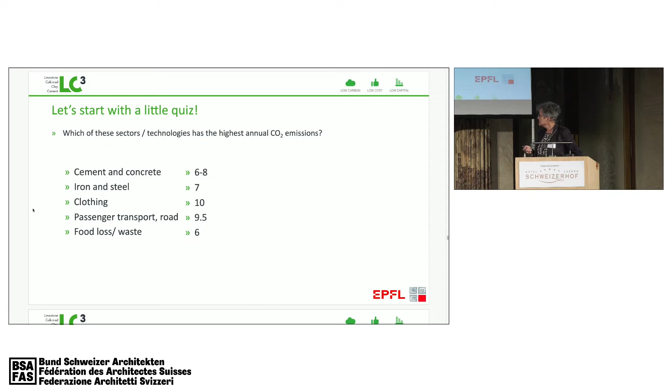So you see here I've compared various different sectors: cement and concrete, iron and steel, clothing - maybe a big surprise there - passenger transport, road, food loss, food waste. The message here is yes, cement and concrete is making a lot of CO2 and we need to improve that, but there are a lot of other things emitting the same kind of amount of CO2, so we need to really work on everything.

Now, the reason we have these very high emissions from cement and concrete is that we produce so much of it. We produce more materials based on cement than we do of all other materials put together. And in fact, as you see at the top here, it's intrinsically a low energy material with low embodied CO2 and embodied energy.

So we don't really improve things by replacing concrete with other materials, but we couldn't do that at any rate because timber is a very good material for construction, but if we wanted to replace just a quarter of materials made from cement with timber, we would actually have to plant new forest 1.5 times the size of India. I think we can easily realize that this is just not feasible given the competition for land use.

Most of what I'm going to say - I don't know what's happened to these slides, because they seem to be in a completely weirdo format and they don't move.

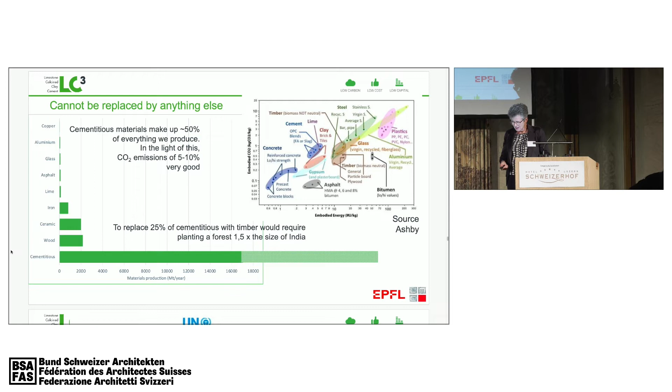Cement is kind of unusual in that most of the CO2 emissions are not coming from the energy. This is important because even though we can move to renewable energies, it's a little bit more difficult for cement - that's not really going to solve the problem.

A cement kiln looks like a kind of dirty industrial tool, but there's been immense improvements in efficiency in the last few decades, and now it's actually one of the most efficient high-temperature processes there is. It can also be really effective for waste disposal, because in Europe many factories, including those in Switzerland, are operating with more than 80% waste fuels, which really reduces the need for fossil fuels. So most of the emissions are coming from limestone.

Limestone is 80% of the raw material, and during the process it breaks down into calcium oxide and CO2. I'm going to come back to that, because of course a lot of people say, well, can we replace limestone? We'll see the answer to that in a minute.

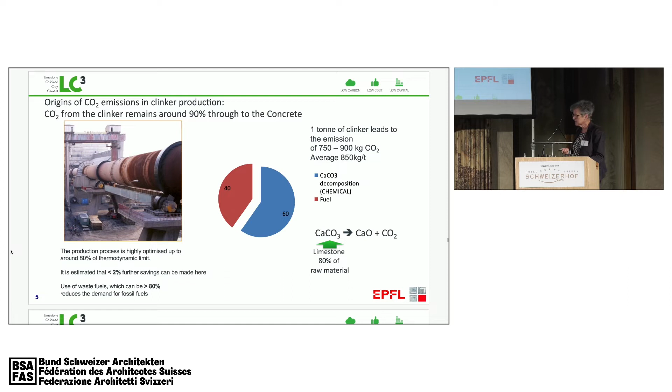In terms of where concrete's being used, we have to realize that only about 10% is being used in developed countries - only 5% in Europe, and the amount used in Switzerland is really very tiny. Therefore, if we're going to address the problem of cement and concrete, we have to engage with what's going on in emerging and developing countries.

We've seen tremendous growth in China in the past three decades. China's probably peaked now - the demand for cement is going down, but this is now going to be replaced by demand from India and particularly Africa.

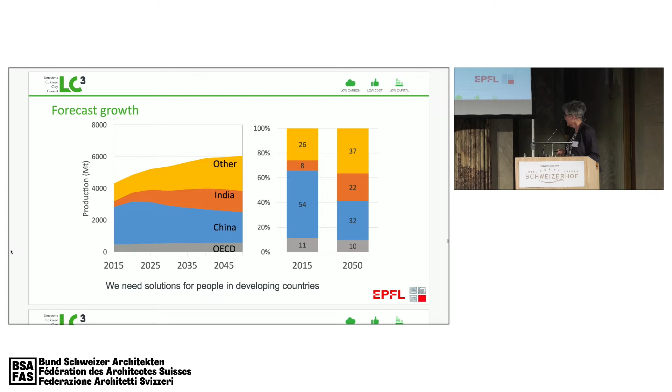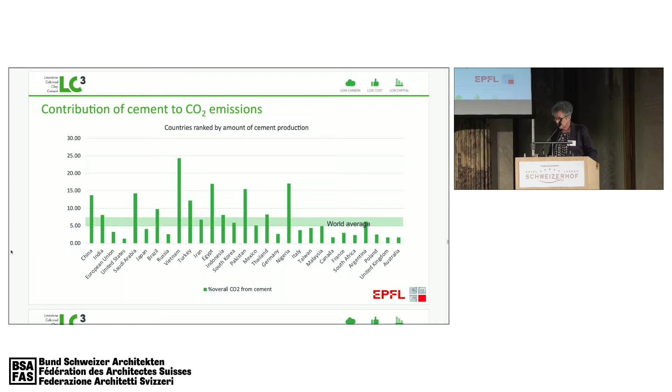And of course, in these countries, we have a very large need for housing for people. Oh dear, now it's not working again.

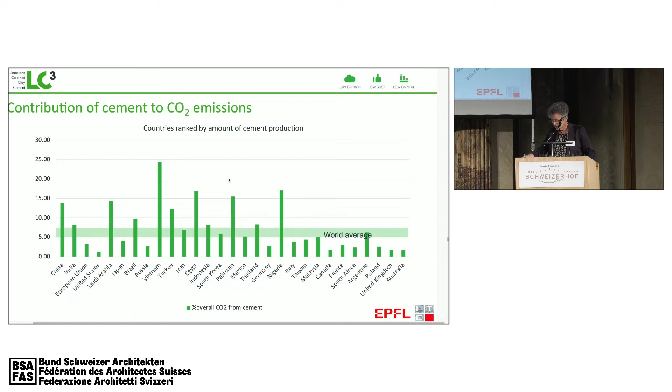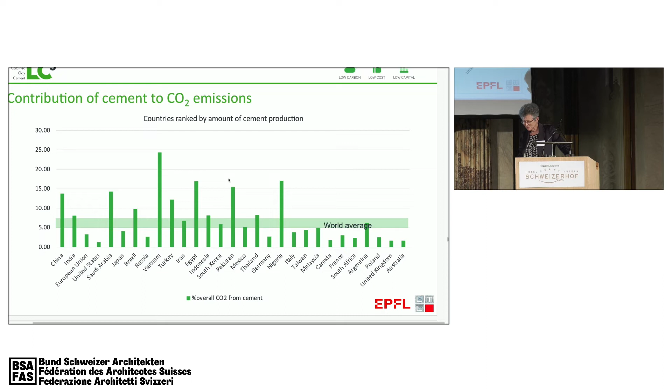You see that many people are living in really unsanitary housing conditions. This leads to a lot of disease, and the unsatisfactory living conditions give a big incentive to people to try to migrate. So if we want to solve this problem, we really have to be able to provide them with decent housing.

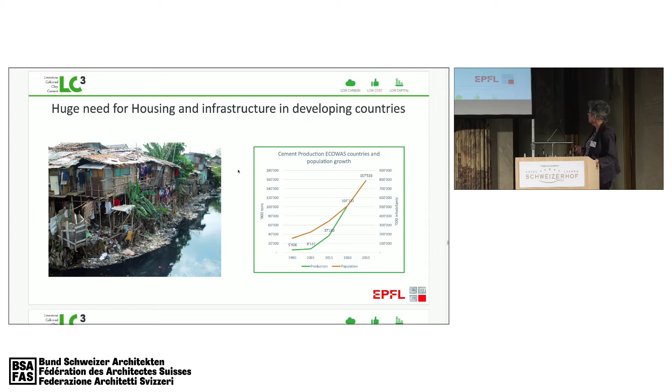The figure on the right shows first of all the real figures, but then the projections for the increase in demand, in the population, and therefore demand for cement that's occurring, for example, in the West African region.

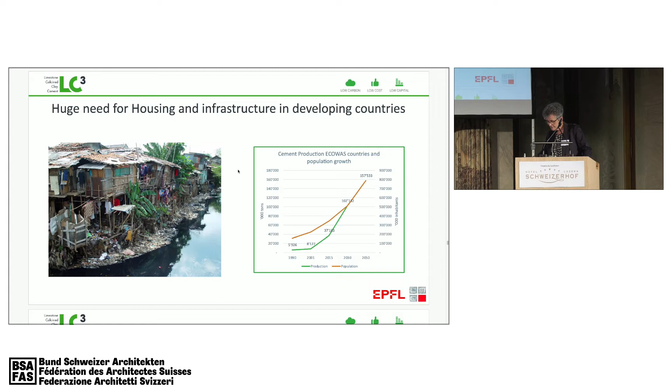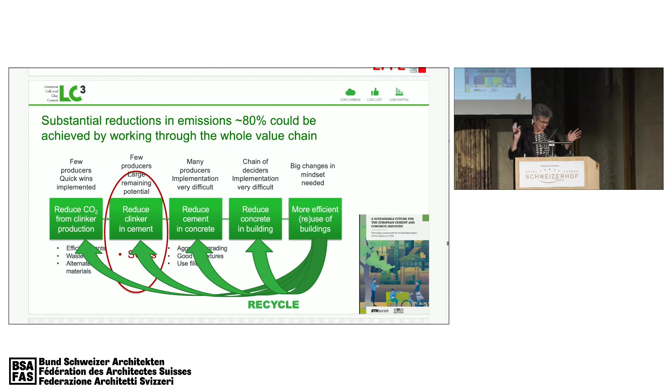Whoa. It's very bizarre. I have all nice animations on all of these slides, but none of this is working. But let's worry about that.

The important thing to realize is there's really no magic solution for doing away with the CO2 emissions from cement. Many manufacturers are saying we have to go for carbon capture and storage, but I think we know this is really not a realistic solution because it's going to be extremely expensive and very difficult to implement.

On the other hand, we can actually make very large reductions if we work at all the different levels. I'm going to speak a bit more about how we can reduce the clinker in cement by using substitute materials, but we also need to work on reducing cement in concrete, reducing the concrete in the buildings, which is of course where you architects come in, and more efficiently using, and of course reusing buildings rather than demolishing them. And if we have to demolish them, then we have to make sure we can recycle.

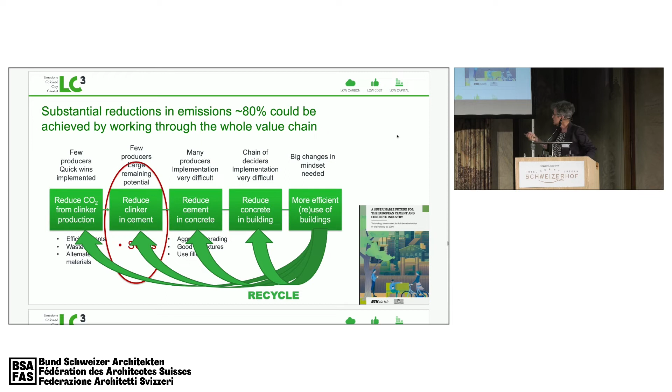Concrete can very well be recycled on many different levels. You can take elements and put them into new buildings, or you can crush them up and put them back in concrete, or you can use the fine material to make new cement. So there's many different levels you can recycle on.

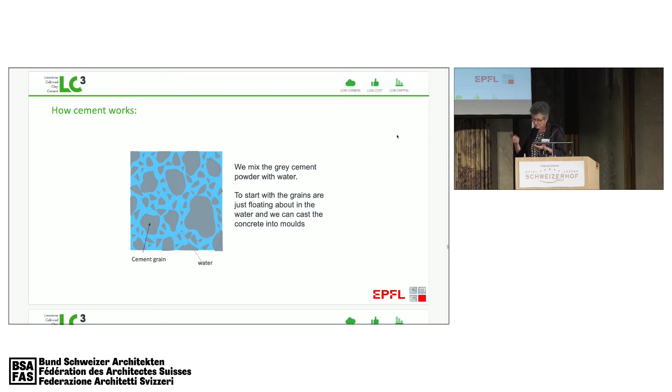If we think how cement works, a very simple scheme is like this: at the beginning we have this gray powder floating around in water, and this is very nice because it makes the material fluid. We can place it in the forms, and then what happens is the cement starts to dissolve, like if you put sugar in your coffee, it will dissolve. It will dissolve and go into the water, but then the different elements that make up the cement get into new combinations.

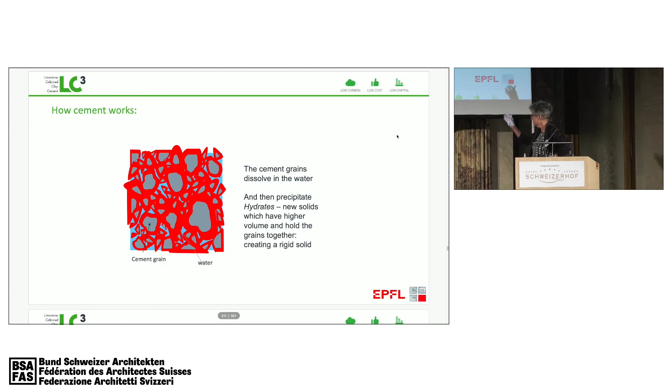What happens is they deposit these new materials, which are called hydrates, and here I'm showing them in red. Because these are combining with the water, it's actually a chemical reaction with the water, it occupies a higher volume and it sticks all the grains together.

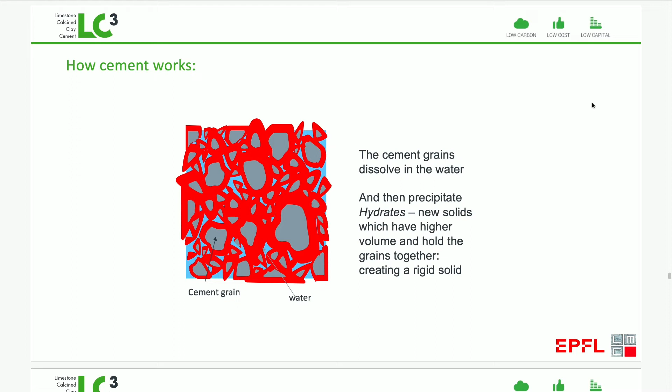Now, if we want those properties of being able to dissolve and then deposit these new hydrates, what we find is that when we look at these elements that are very abundant, the sodium and potassium are too soluble, while the iron and magnesium are too insoluble. So we come to a system of just three oxides.

This is kind of amazing, because we've taken the whole composition of the Earth and we end up finding that there's only basically three elements with oxygen that we can use. And of course, this means that we can really explore all the options. There's no surprise out there.

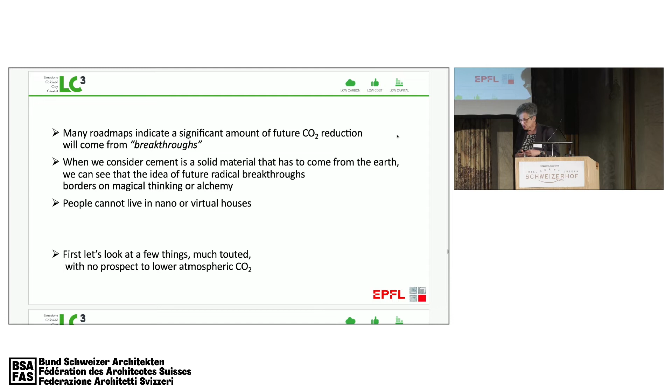I think this is important because when you read the studies that many people have done in their roadmaps, they come up with solutions that are possible, and then there's this big gap between what's possible and what we need to do. They say, well, there's going to be some breakthrough in the future. But what I want to convince you is that there really is going to be no breakthrough, because of the composition of the Earth, which clearly is not going to change.

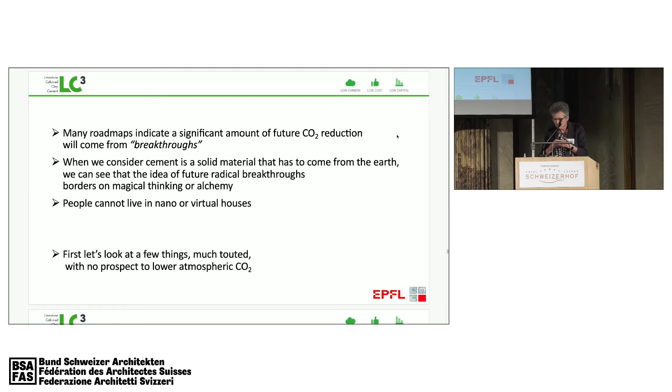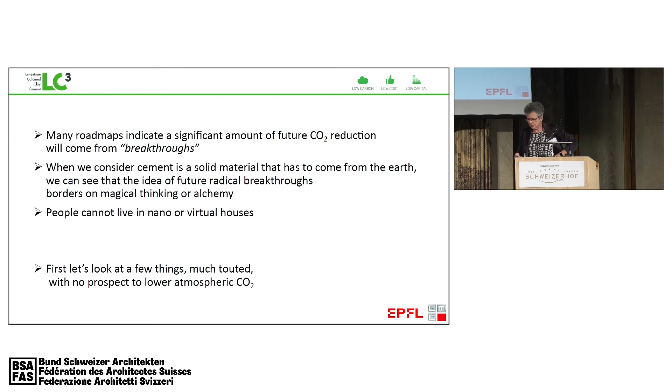And the fact that cement is a solid material, we can't miniaturize it. People can't live in nano houses or virtual houses. Unfortunately, there are a lot of people out there saying things that aren't true about what can be done to make cement with lower CO2. One of the things people are saying, they're not really understanding the process.

So the process, as I've explained, we start with limestone. This gives off CO2 during production, and in fact it can reabsorb that CO2 over its lifetime. The problem is that's not a solution, because the reabsorption occurs much, much more slowly, over 100 years or so.

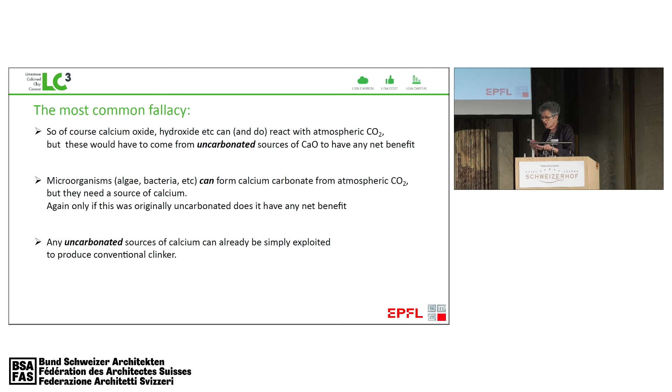Some people say what we can do is add things like calcium oxide to cement, and then it will absorb more CO2. Well, this is kind of true, but it's actually no help, because they don't really take account of where you get the calcium oxide from. In getting the calcium oxide, you give off a lot of CO2, and you can't gain back more than you gave out in the first place.

Similarly, there are a lot of romantic notions that we can use algae and bacteria to form calcium carbonate, and they do form calcium carbonate, but the problem is they also need calcium to do that. So you have to give them a source of calcium, and only if this was uncarbonated—and we have hardly any of that around—does it have any net benefit.

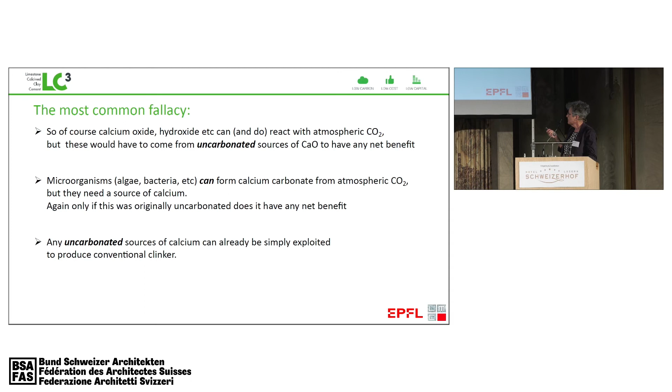The next slide is another technology, but I'm going to skip over that since we're running out of time. The message is that Portland cements will dominate, and what we can do is replace a large part of the Portland cement with other materials.

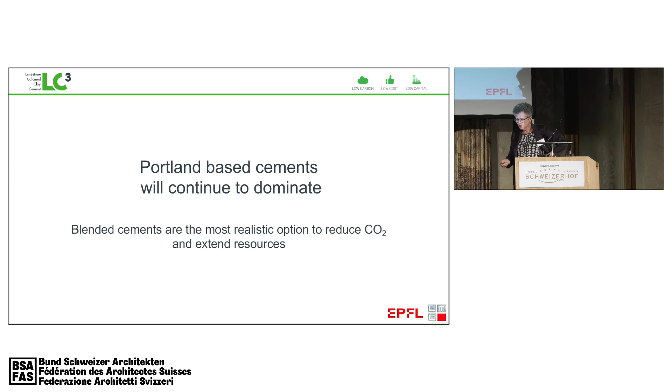In the past few decades, what we've done is use byproducts of other industries, particularly fly ash, which comes from burning coal, and slag from producing steel. Both of these can be substituted in cement. But the problem is that the amounts of fly ash and slag available are quite small, and therefore the level of substitution can't go up more than what it is today.

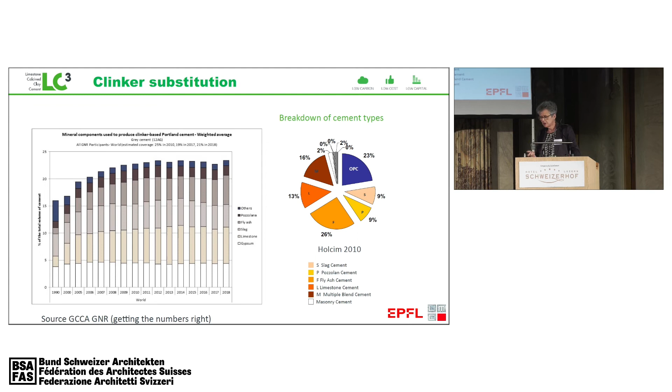And moreover, things like fly ash are probably going to disappear, because this comes from the CO2-intensive process of burning coal. So we have to look at what else we can have available, and basically this is where we come to the idea of calcined clay, which is what we're really working on in our lab, because clay is super abundant.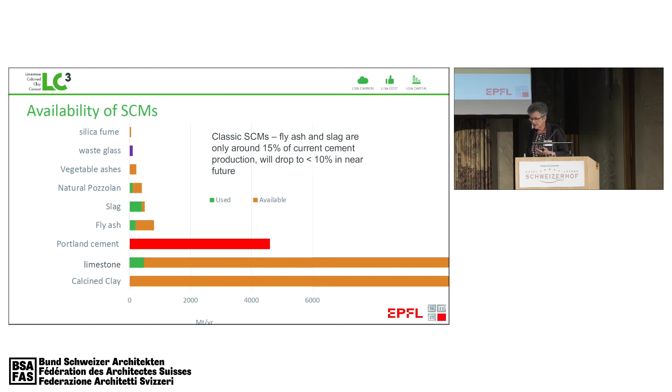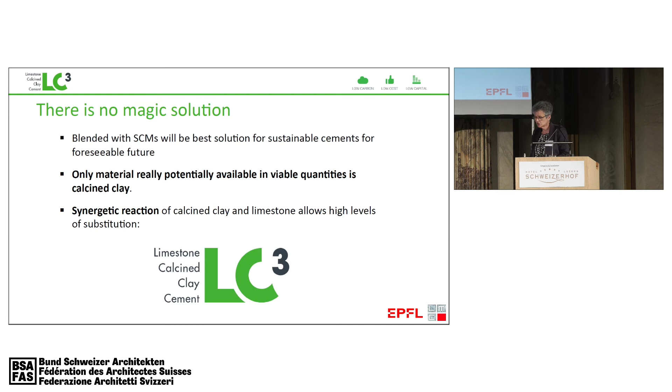If it's calcined, that's to say heated to a modest temperature of about 800 degrees, it becomes a very reactive material. You can use a combination of calcined clay with limestone to give high levels of substitution. On the next slide, you'll see that for a material with 50% less clinker, you can get the same strength evolution, but with 40% less CO2, which is very interesting.

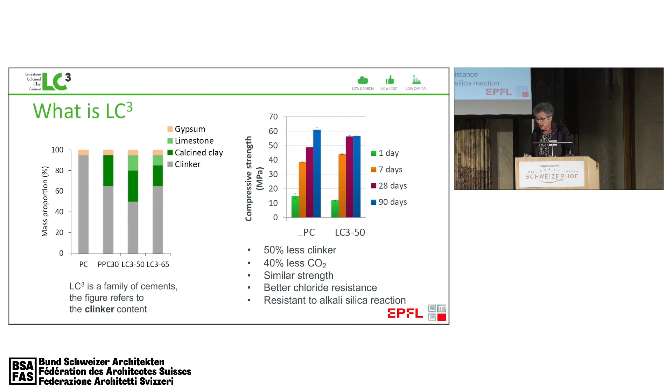Some properties are even much improved, like particularly resistance to chloride, which is the number one cause of poor durability in concrete, because it corrodes your reinforcing steel. And the kind of clays we need are really very, very widely abundant.

So everywhere you see this kind of orangey, brownish orange color, then you have the suitable clays you need. These are actually available in those countries where the demand is really going up, notably Africa, South America, and Southeast Asia.

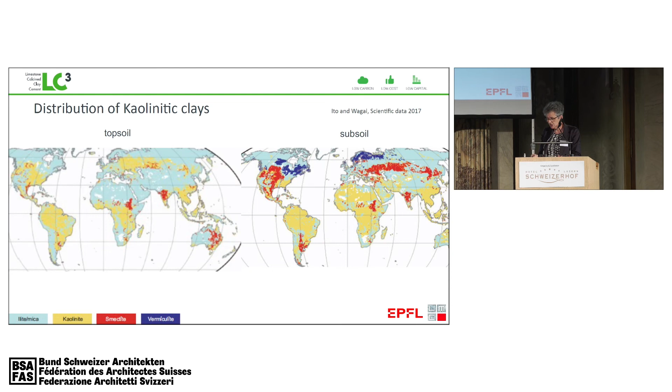So this is really a viable solution because we have these materials available. And often even these materials are byproducts from other mining operations, like that you saw very quickly.

Oh dear, sorry. Oh dear.

So if you can really roll out this technology, and it is very, very easy because you can apply it with existing technology, we have a potential to save 400 million tons of CO2 per year. And that's a really important figure. Just to put it in perspective, it's like 10 times the emissions of the whole of Switzerland.

So we know how very difficult it will be to go to total carbon neutrality in Switzerland. Of course, we should do it. But if we invest in this technology, we can have 10 times more impact. And of course, CO2 doesn't stay within national boundaries.

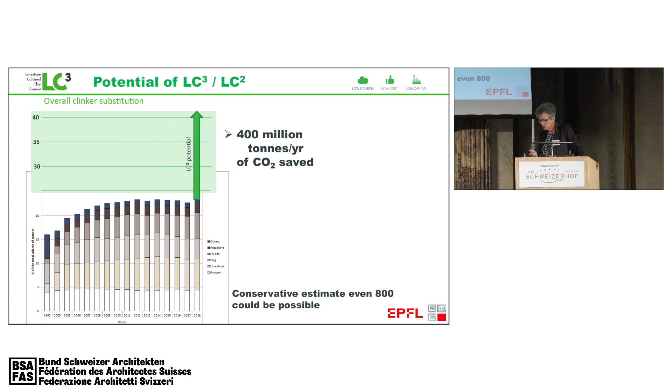And we can produce this, as I said, with existing equipment available today. I really don't understand this slide controller.

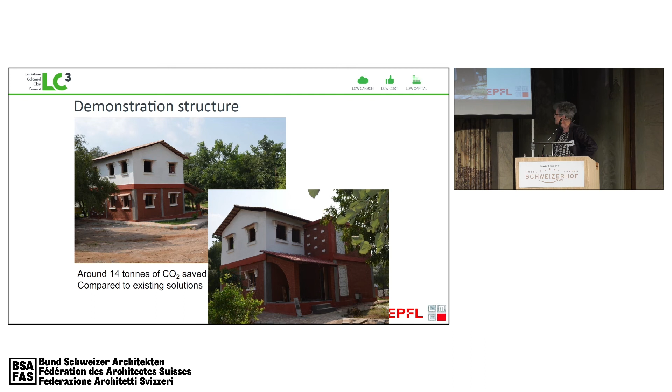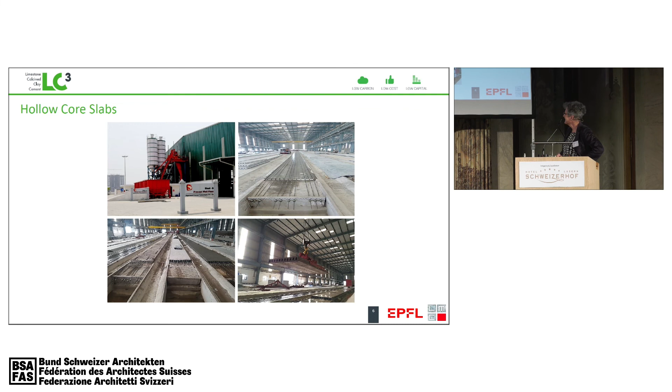And this shows you, for example, a full-scale house we built in India. In the next picture, there's another application. Where? Here. Okay, well, I'm pointing everywhere, but it's just impossible.

So, okay, and finally, at the end of the day, we can do this even more cheaply than we do it today. So fortunately, after quite a few years of promoting this technology with the support of the Swiss government, we are getting really traction in the area, and the major producers are really looking to produce it.

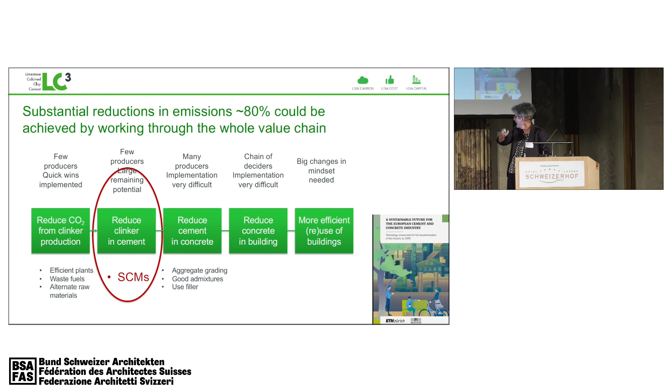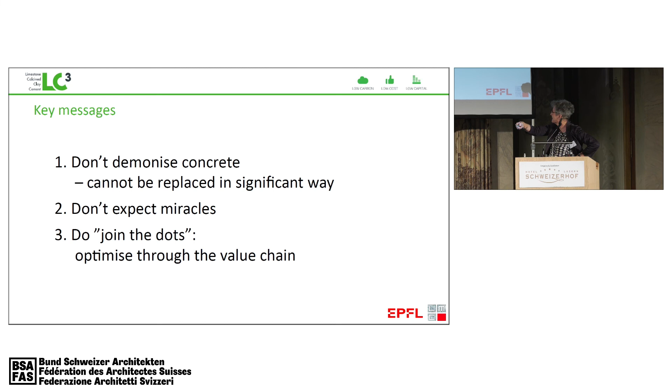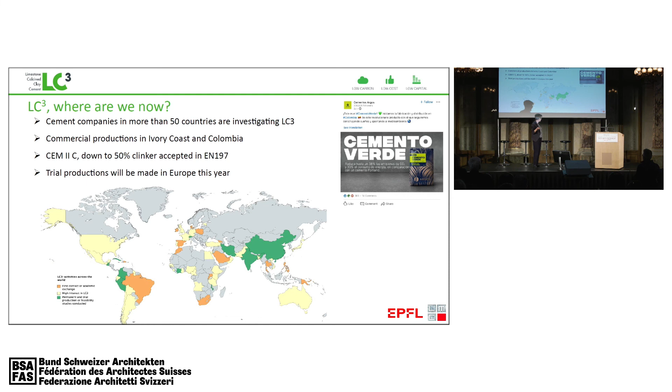This just shows a few of the extracts. Oh, come on. No, that's not the one I want. No, why are we going forward? I want to go back. Oh, dear. Right. Okay, so maybe I stand over here, it works. No, it doesn't work any better. I think it's supposed to be running out of battery, quite honestly, because it just doesn't work.

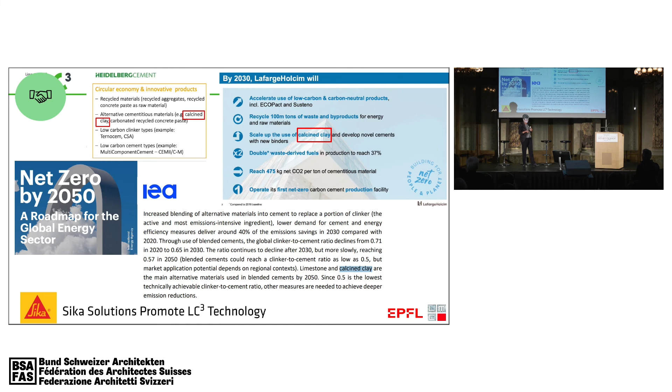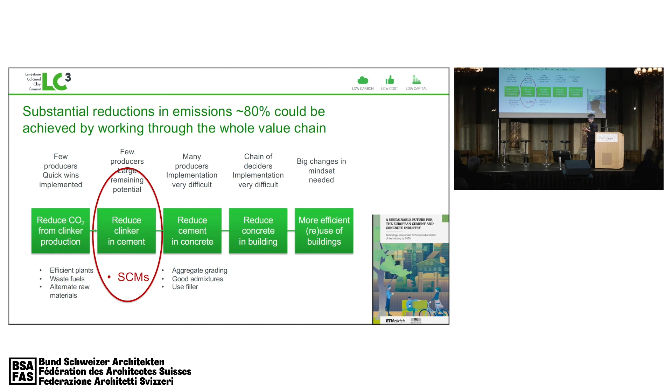I just want to come back to my previous slide here to say, as I said at the beginning, that this is not the end of the story, because we still need to work all through the value chain. And just to give you a quick example on this, if you look at these figures for concrete, the important thing is to see the scatter.

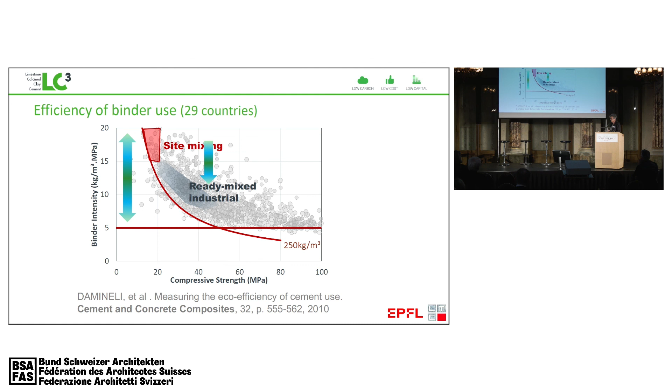Because what this tells you is that for a concrete with exactly the same performance, you can have some concretes that use 1 unit of cement and some which use 4 times that amount. And clearly, if you're using 4 times that amount, then you're wasting 75% of this, you're increasing your CO2 emissions by 4 times. And this is what we have to stop doing.

So finally, I'm at the end. I'm sorry for all the technical issues, and it's not normally how I present, but at the end, I really want to give you 3 messages.

First of all, please, I think people need to stop demonizing concrete. We can't replace it in any significant way, and we really need it if we're going to solve the problems of growing populations and urbanization in many parts of the world.

The second message is don't expect miracles. There's no kind of magic wand out there that's suddenly going to produce an alternative to concrete. So please be careful what you read in the press. You can't have completely zero carbon concrete, you can't have carbon negative concrete, but you can have very low carbon concrete.

And to get this very low carbon concrete, you need to work at all the different levels. What I say, join the dots. You really need to optimize at all levels, at the level of the cement, at the level of the concrete, and the level of the buildings. And therefore, we really need to promote the dialogue between the material scientists, between the civil engineers, and between the architects to achieve those reductions, which are possible.

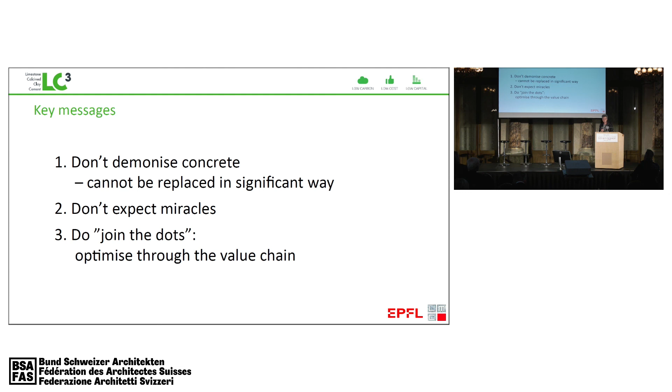And I think in that way we can really have a very huge impact worldwide. So I'd like to thank you for attention and sorry for all the difficulties.